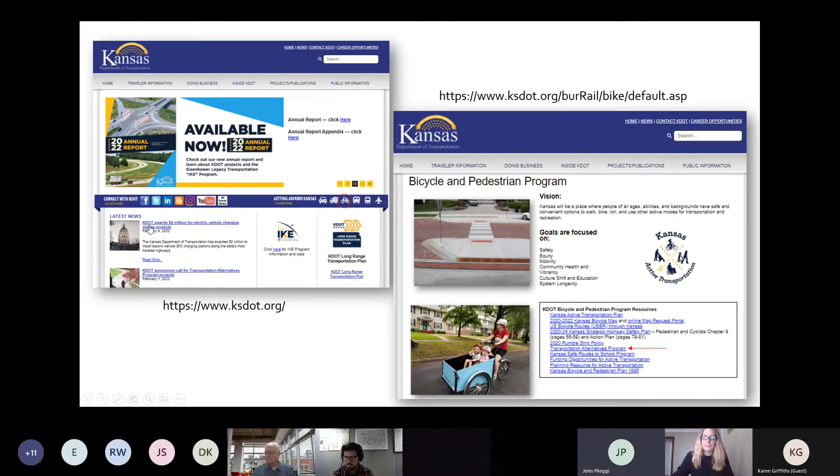I just wanted to draw your attention to our webpage. This is where you will find the information you need to submit a concept paper, which we will talk about in more detail. The website has been posted on the press release and emails that have gone out, but if you need to find our webpage, just locate the Kansas Department of Transportation homepage, then the rest is pretty easy. I'm going to run through it really quick to show you some of the features and resources available.

All right, so this is the homepage for KDOT. You can always find the bike page by clicking on the little bicycle icon on the right side. If you click on that, you'll arrive at the home page. From here, you'll be able to see our new vision and goals that were developed from the active transportation plan, which is currently in draft form. We're working through to get a final document, hopefully in the next month or two. But once you're here, you can find the Transportation Alternatives Program link right here.

But I also want to draw your attention to other resources. This is where the active transportation plan link or page will be once that is available. There's stuff there now, like some great PSAs and other videos and tools you can look at, but a lot will be added soon. And then you can order your bicycle maps or share with community members, or if you have an organization you want to hand them out at, you can do that too.

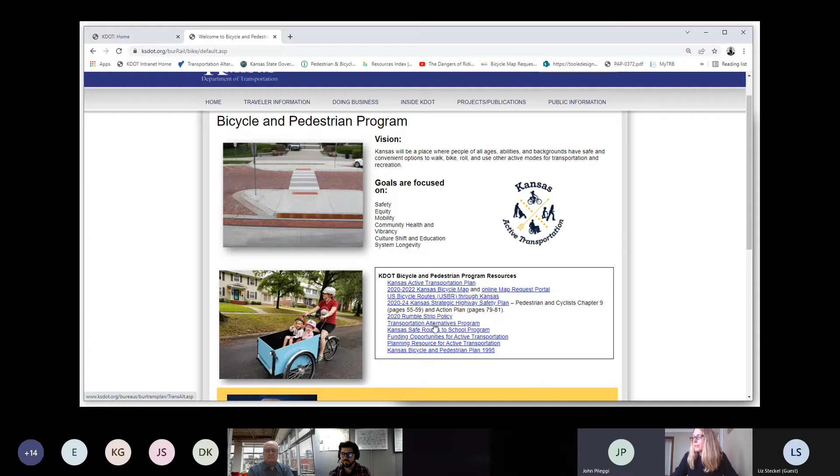So I'm going to go ahead and click on the Transportation Alternatives Program. This is where you'll be able to find the concept form, download it and complete it, and then just email it to me. Be sure, if you have attachments, to put it all together in one PDF. This is also where there are links to some maps that we will discuss later that will be of use.

And down here in the key documents, I'll be adding to this. We have the slides available there right now. I do plan to probably give some more updated slides after this meeting, or at least on Monday, along with recordings of this webinar. There's the KDOT district maps and area office contacts, so if you want to get in touch with your district or area engineer, frequently asked questions about the TA program, and again, the concept form. We'll be posting the TA and Safe Routes to School guidance documents and scoring rubrics there soon.

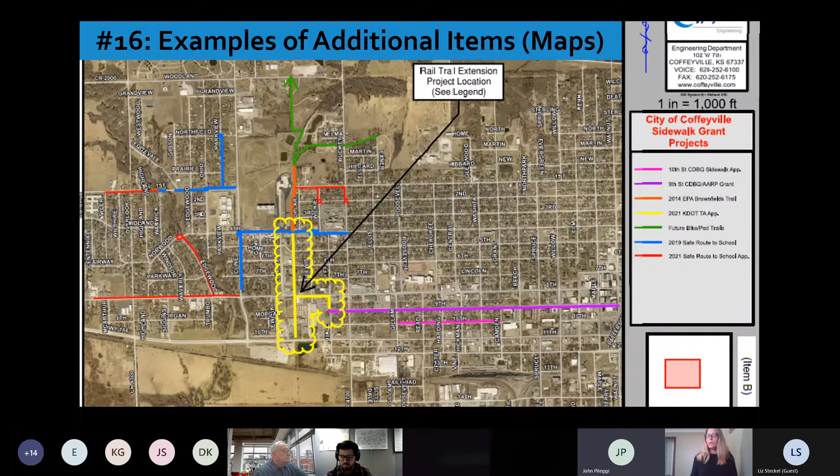It's another example of a community. They happen to have these designs done, and this is especially nice for our engineer reviewers who understand this.

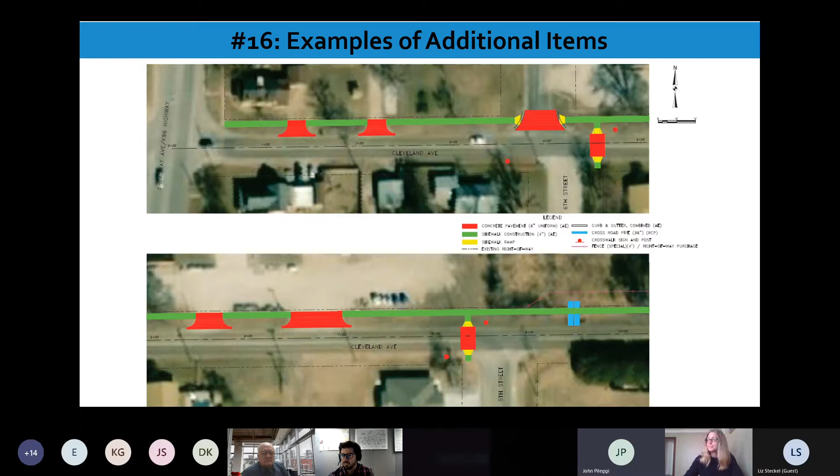Okay, so those are just some examples. If you know, there are some tools that you can go in and, Matt, what is that one tool where it's the My Street, or where you can put bike lanes and sidewalks based on the width of the street?

Yeah, Streetmix, I'll put the link in the chat. So even those little kind of diagrams, it allows you to say this is the width of my street, this is how wide the road is, and you can just play around and put in the different elements so that we can have that visual of what you're hoping to accomplish.

As mentioned, the project concept is required, so we will only send applications to those who have submitted a concept paper. And we will review those concept papers as soon as we receive them.

So the deadline is March 4th, but you can submit it at any time. All the details don't have to be worked out, but as much as you're able, we'll be able to provide the best feedback with more details. But you don't have to wait till March 4th. The sooner you send it to us, the sooner we'll be able to review, provide feedback, and get you that application packet. Definitely send it earlier so we can have a better idea of what we're looking at in terms of applicants.

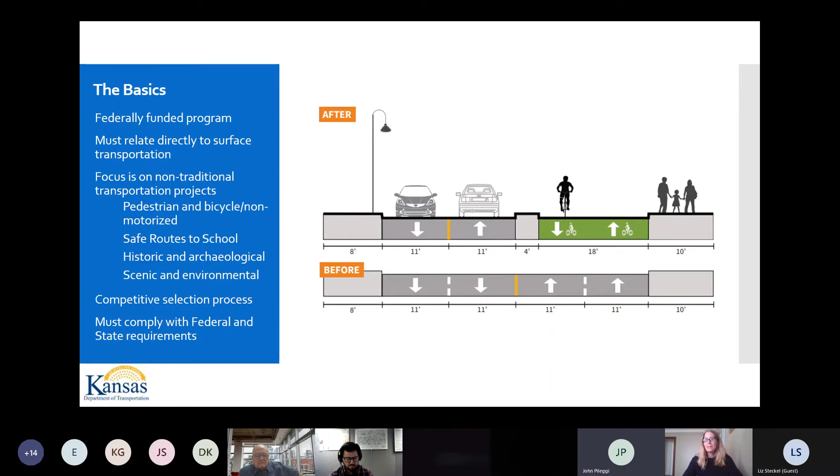Some eligible applicants: local governments, so city and county are typically the most common applicants, especially cities, transit agencies, natural resource public land agencies, school districts or local education agencies specifically for non-construction, tribal governments, small MPOs can now apply, and the non-urbanized members of MARC and WAMPO. Even with the new bill, there were some changes in eligibility, such as KDOT applying on behalf of a community, but that's not something we will be allowing yet, at least not this round.

Nonprofit entities are not eligible either. The urbanized areas of MARC and WAMPO receive their own suballocation of funds and have their own competitive process, which is why they are not eligible to apply. The Kansas Department of Wildlife and Parks also receives TA funding; their call for projects should come out in November and is very focused on recreation trails—trails, parks, trailheads, and those types of things.

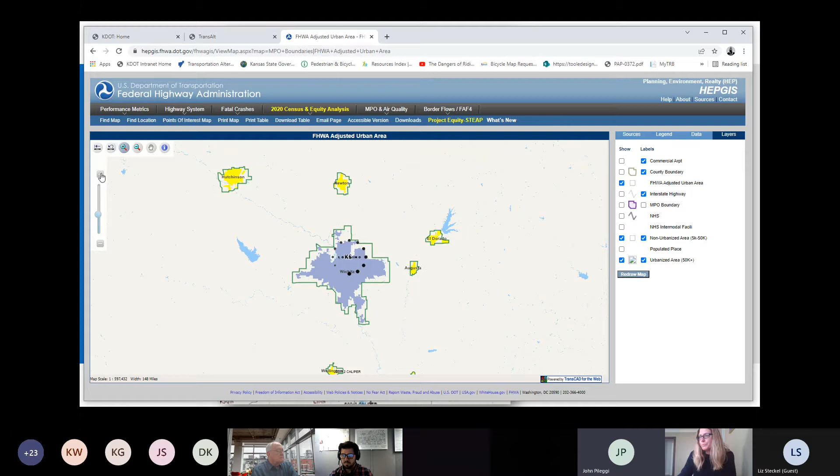As it's zoomed out, everything will be relevant. And then you can click on the little microscope with the plus sign, say we want to go into the WAMPO area, just do a little box around it. That's an easy way to zoom in exactly where you want to go. And then just continue to zoom in - oops, you need to press the redraw map for those things. But I need to recheck it here, hold on.

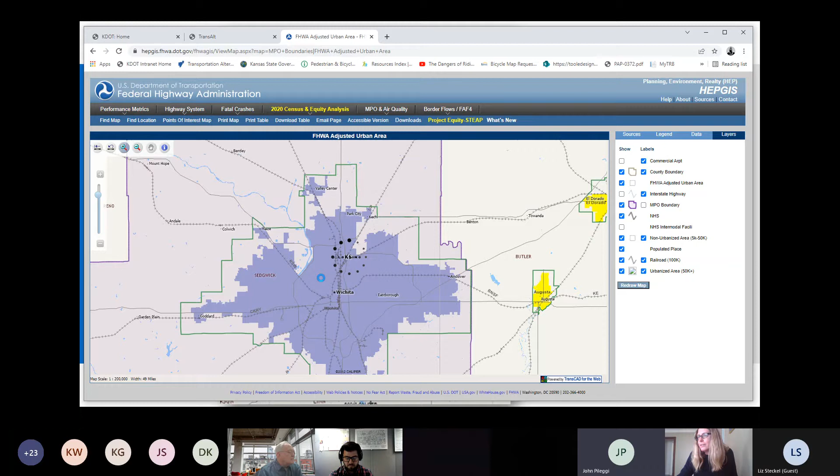So mostly it's like the MPO boundary, you want that to show up. Populated place. If you want to see the railroad, you can do that too, which is helpful. Oops, make sure if you want to pan that you hit the hand first, otherwise it'll do whatever you had on there last. Okay, so as you can see now, you can see where the railroads are, the communities outside of the urbanized boundary, and be able to confirm where your community is if this is relevant to you.

Sean, that sounds like a great project, and we really like to see connections with what would be considered recreation trails and transportation networks. I don't know how many of you have a situation like that in your community, but whenever possible, I try to get off the road and on the trails to get where I need to go, whether that's to the grocery store or to a restaurant or to work. So looking at the in-city sidewalks, bike lane kind of networks, and connecting to your trails is a great amenity for your community, increases quality of life.

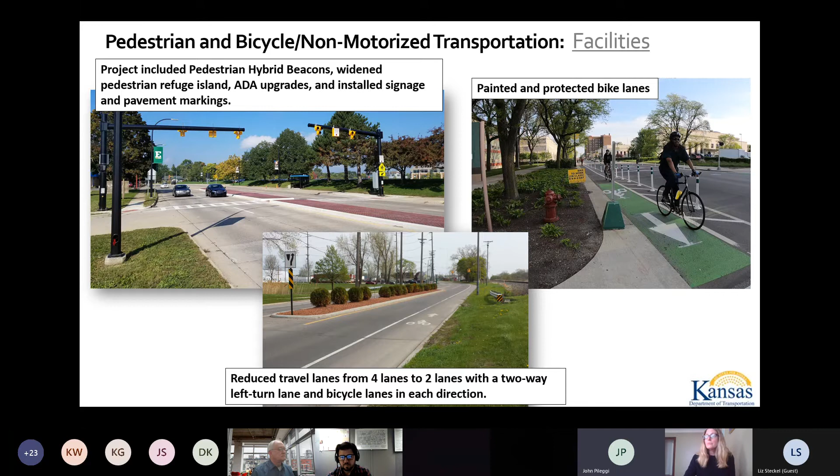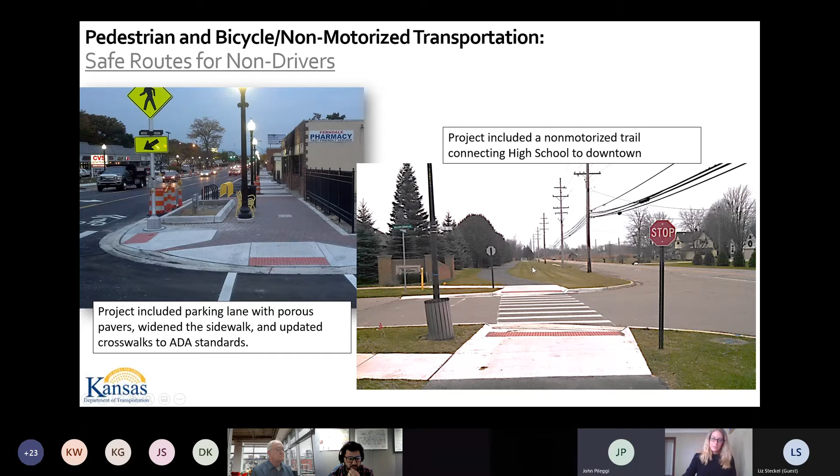So something to think about if you're in communities with abandoned rail corridors, but also thinking about whether you're what we'd call a trail town, whether next to Flint Hills or Prairie Spirit, or even the US bike routes - we have US Bike Route 76 and 66 in our state that are signed and used by long distance cyclists. Think about how you can invite those folks using the US bike route or the rails to trails, how you're inviting them into your town and making your community more bicycle and pedestrian friendly.

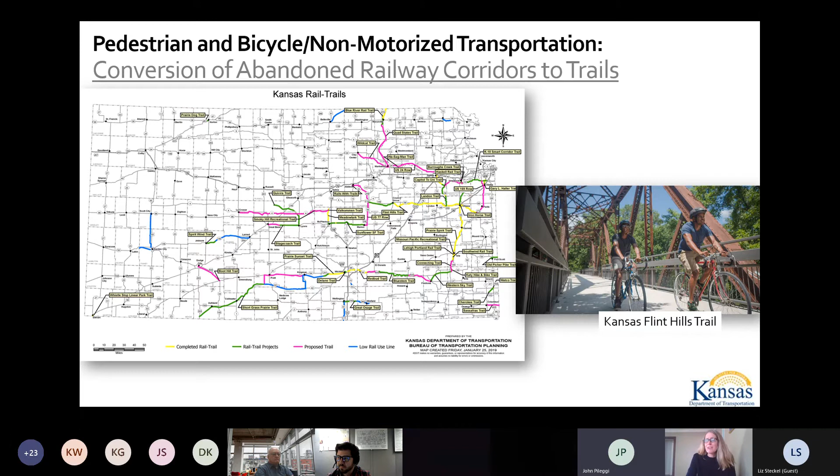It's a great opportunity to increase economic growth. And if you want a good example: Sterling, Kansas. They're about a mile off the US bike route and are doing a lot to attract cyclists into their town - come stay the night, eat at the restaurants, they have showers and bathrooms, making it very inviting, and it benefits the community members too.

So diving a little deeper into Safe Routes to School, we have the planning and non-construction categories. This funding can be used to develop a Safe Routes to School master plan for your community. In some cases where the community is really small, it could serve as a community-wide plan, but definitely looking at within 1 to 2 miles of the school.

Once you have developed this master plan and it is approved by your city council or county commissioners, you're eligible for the education, encouragement, enforcement, and evaluation activities category, and also new as of the last call, preliminary engineering or design on routes identified in your master plan. So anything you propose in these categories, like education and programming or design, should tie directly to what is in your master plan.

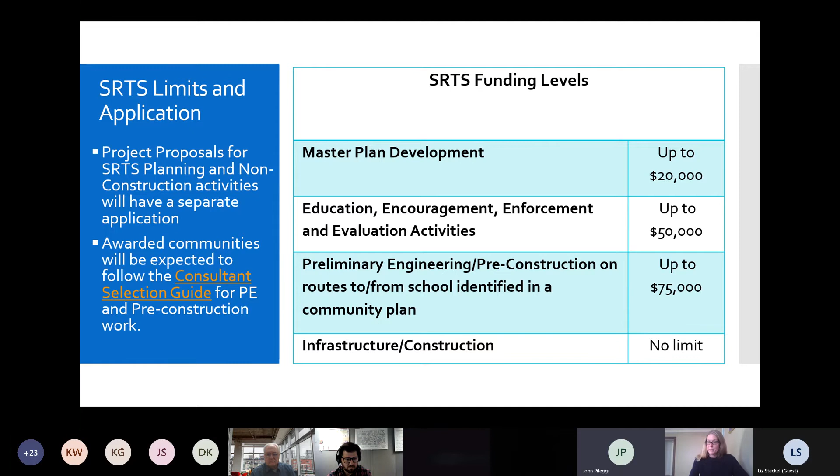For construction, if you have a Safe Routes to School master plan and want to start building the facilities outlined in it on the routes identified, you just select the Safe Routes to School construction category.

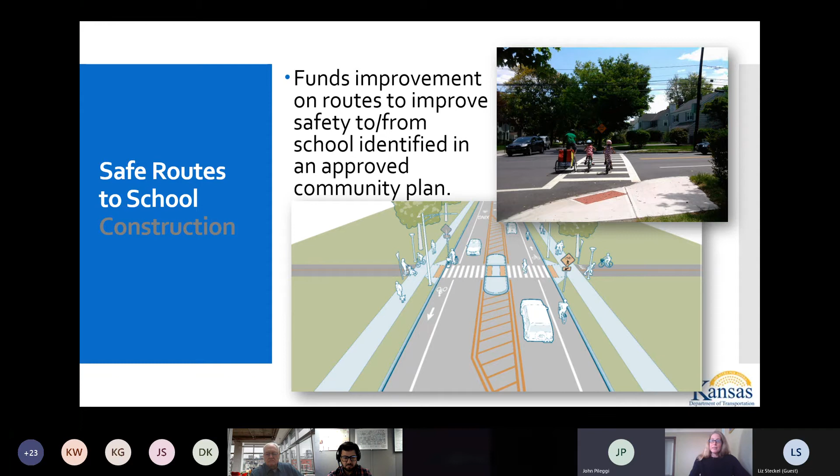I just want to point out, say you don't have a Safe Routes to School master plan, but your community desperately needs sidewalks and safe crossings because kids are walking in the street without safe crossings. You do not have to have a master plan to apply for those projects. You just select the bike ped category, and definitely emphasize that the need is for kids to get to and from school safely.

Diving in a little more to the historical category. If you're interested in this, we have a contact with the Historical Society who can answer questions and who would be reviewing your application. An example of this, this is the only one I can think of - sometimes a train depot station can be redone for city offices, like in Strong City, and I think in Ottawa too. Those projects were funded with TA funding.

That's exactly right. So historic transportation related facilities, which are buildings, and also this is the category we use for historic brick streets as well. So if your community has, say, a main street that's brick and your brick needs to be redone, this funding could pay for that.

However, your application will be a lot more competitive if you don't just include the redoing of the brick streets, but also tie in maybe some streetscaping facilities, like safe crossings, ADA accessible corners, sidewalks, that kind of thing too. I'd like to see a slightly bigger picture than just the redo of the brick road.

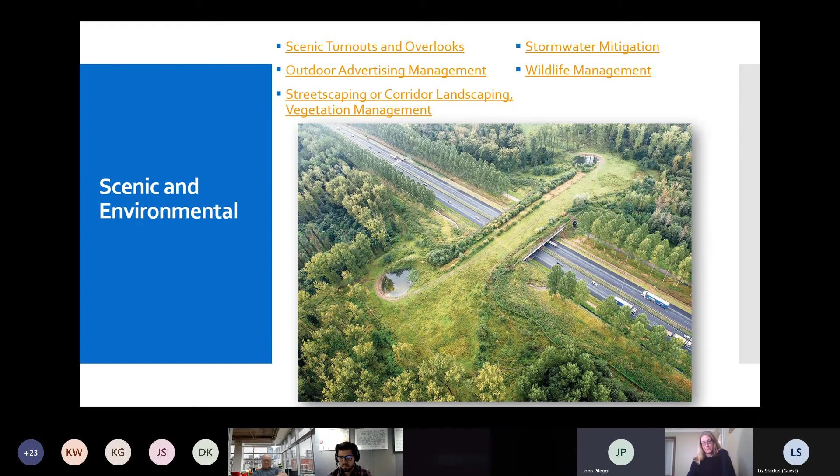All right, so getting into the local cash match for construction specifically, the match has to be 20% cash match, so on participating costs related to the construction and inspection.

Costs related to right-of-way, utilities, or preliminary engineering don't count towards the match because they're not participating costs. That is 100% the city or county's responsibility.

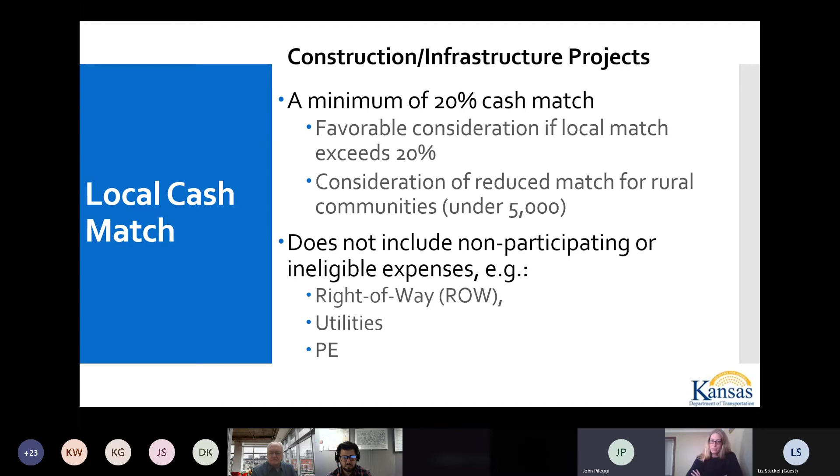Likewise, with non-construction projects, the 20% cash match would be on participating items related to that, such as developing the plan, doing education programming, or preliminary engineering. As we mentioned, for both of these there's potential flexibility with the match for communities under 5,000, depending on what comes out with the new bill and what we see with applications in larger communities on match contributions.

You have a question from Micah: would the scenic environmental category cover installing water systems on park grounds that do not have water access?

I don't know the answer to that. Do you, Matt? No, that's a tough one and certainly a first. It sounds a whole lot more Recreational Trails Program relatable, which is administered by Kansas Wildlife and Parks. But we can look into it, because usually what's eligible in that program is also eligible in TA, just not the focus and purpose of TA. So we'll look into it and get back to you. But again, that's a first.

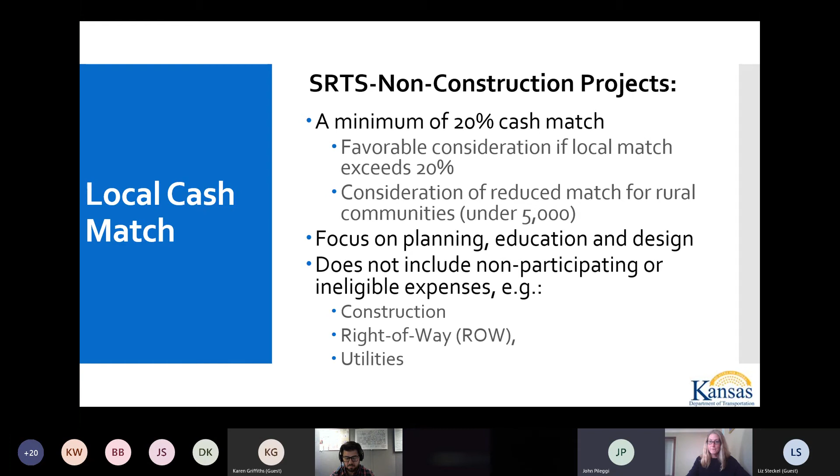Okay, great. I'd love to see that—that diverse buy-in, whether it's community health, public health, historical, or art partners. Those are all options and ways to make whatever you build an even higher quality addition to your community.

We were talking to one community about building a bridge, and they got in touch with looking at historical and art components. Instead of just building a straight bridge, they looked at artistic designs for a bridge and how much cooler that would be for the community. So just keep that in mind.

Carly did provide a dashboard where you could click to see if your community is a Pathways community and what options might exist there to maximize your efforts. Thank you.

Public involvement is something most of you are very familiar with and do anyway, but then there are a few other things like the Uniform Act, NEPA, the environmental assessment, and the Americans with Disabilities Act. We do require any facility be ADA compliant, and that seems like it's been a no-brainer for every community.

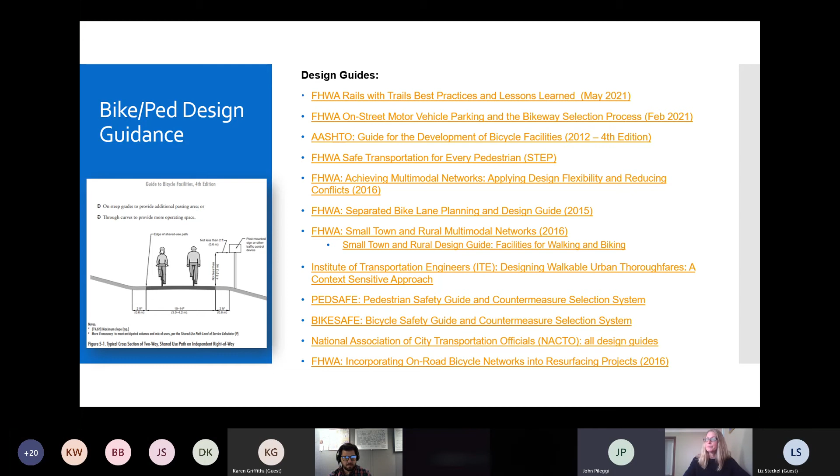So someone asked about a vault bathroom - this would probably be a great grant to apply for that. And I think we've been funded in Kansas for like a porch beautification type project. So if you have any small things that you just want to get built really quick, definitely check this opportunity out. Just learned today that Cost Share is going to be opening up another call February 14th.

The application will be available, and mark your calendars for their spring webinar on February 24th. That's pretty exciting. A lot of communities, if they apply for transportation alternatives and cost share, are hoping to get one or the other. Cost share definitely promotes bike ped facilities, it's a big part of the program. If you go to their website, you can download or look at maps or list of projects from past several calls, and you can see exactly what I'm talking about.